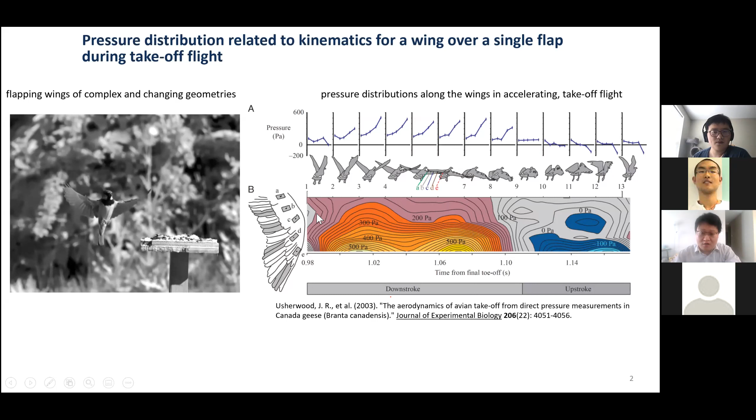Here is a wing of a bird model. You can see here are 5 pressure sensors on the wing. During acceleration and takeoff flight, you can see a very large variation on the pressure distribution. For the downstroke, the pressure distribution is basically positive, but for the upstroke, the pressure distribution becomes negative. During the acceleration, we can find very large pressure variation along the wing.

Basically, many studies have confirmed that birds can actually sense small changes in air pressure. In that case, they can have some prediction for the storm in front of them, so they can prepare themselves for the storm. We're inspired by this idea that maybe for the aircraft, it can also sense the surface pressure on the aircraft, and then it will benefit the flight control for the gust response or something else like the environmental flow.

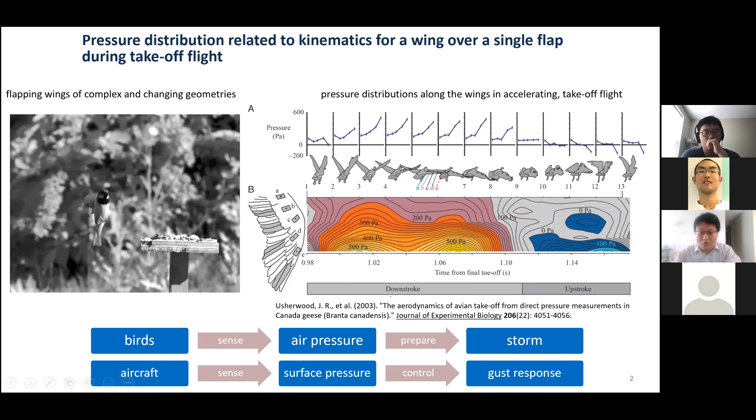Basically, our idea is something like this. We want to get the mapping between the surface measurement and the measured aerodynamic loads. In this way, we can predict or estimate the aerodynamic load from the surface pressure measurement. This model can also provide some insight on how to optimize the sensors located on the aircraft and how many sensors we need to do this job.

Basically, our research focuses on this routine. We care about the gust and any other environmental flow on the aircraft, and we get some major information from the surface pressure measurement. We use that information to estimate the aerodynamic loads on the aircraft. So this is the basic idea of our research.

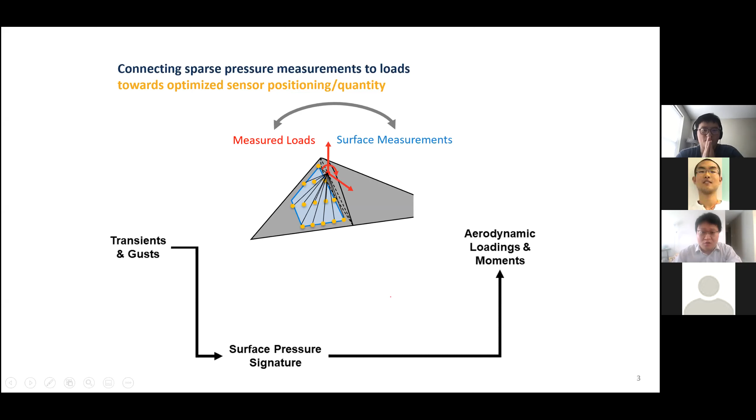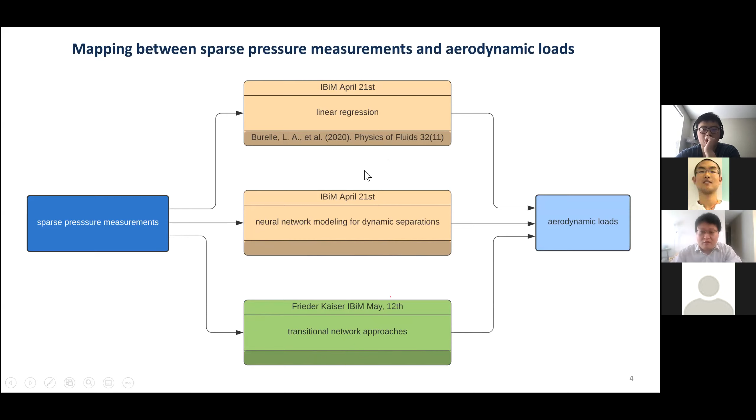For our group, we are developing 3 different approaches for the mapping between the sparse pressure measurement and the aerodynamic loads. Today, I will focus on the first 2 approaches. One is linear regression, and this part of the job has been published in Physics of Fluids already. Another part of the job is we want to get a neural network model for the dynamic separations on the aircraft. Finally, another approach is the transition network modeling, which will be introduced by Frieder on May 12th. So basically today's talk, I will focus on the first 2 approaches.

Here are some open questions my talk may attempt to answer. The first question is, can we actually predict aerodynamic loads from sparse pressure measurements? The second question is, how many sensors do we need to accurately estimate the aerodynamic forces? And the final question is, what is the optimal placement of the pressure sensors?

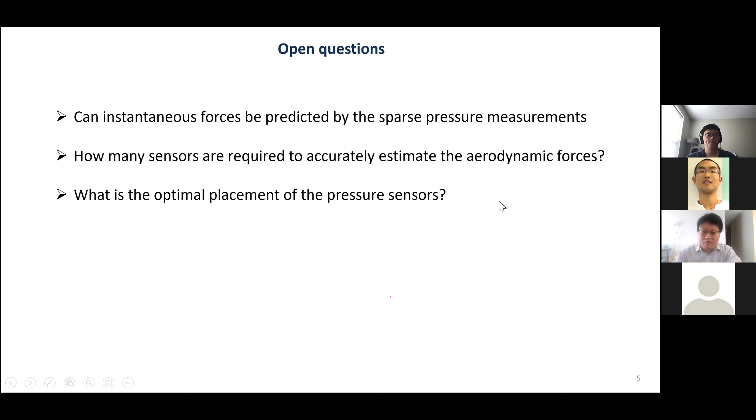Already some research has focused on how to get reconstructed flow information from sparse measurements. For example, Erichson placed sparse sensors on the surface of a circular cylinder, and used this sparse measurement to reconstruct the flow structure for flow past the circular cylinder. Other researchers like Peng also used sparse measurement to predict the flow structure, but for this case, they focused on the 2D airfoil.

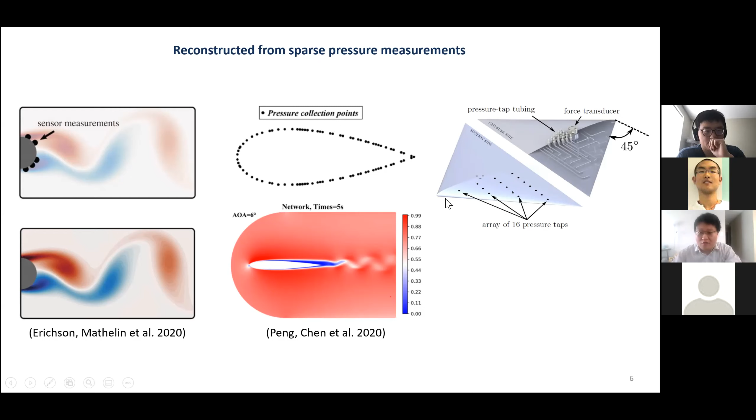Today, for our research, we focus on the delta wing, especially the non-slender delta wing. For this delta wing, we have 16 pressure taps. The delta wing was 3D printed, and all the pressure channels are located inside it. In this way, we get information about the surface pressure on the delta wing, and we reconstruct aerodynamic loads from those pressure taps.

Today I'll first introduce our experimental setup, and then introduce our linear regression between the sparse pressure data and the aerodynamic loads. Then I will introduce some preliminary work on neural network modeling for dynamic separation. Finally, I will introduce some future plans for this research.

For our experiment, it was conducted in a towing tank at Queen's University. As shown here, the model moves from right to left, and we have a linear actuator to drive the vertical motion, and a traverse that can move in the streamwise direction. Here we use the normalized distance to evaluate the motion of the delta wing.

We actually focus on two types of gusts here. One is the axial acceleration—in this case, the delta wing starts acceleration from some point, and after some distance, the acceleration becomes zero, and it continues to move to the end. The other type of gust is a vertical gust.

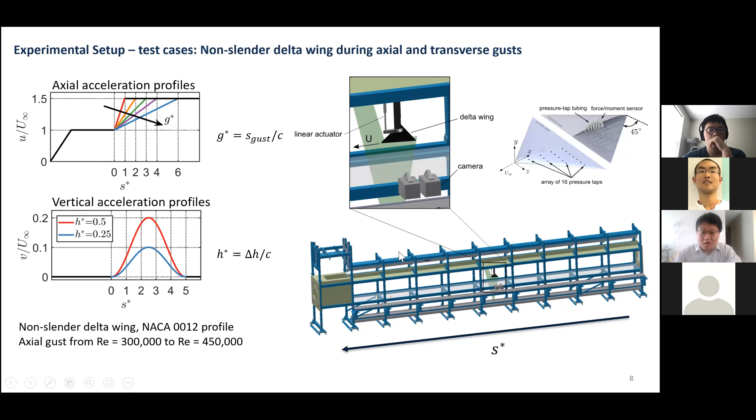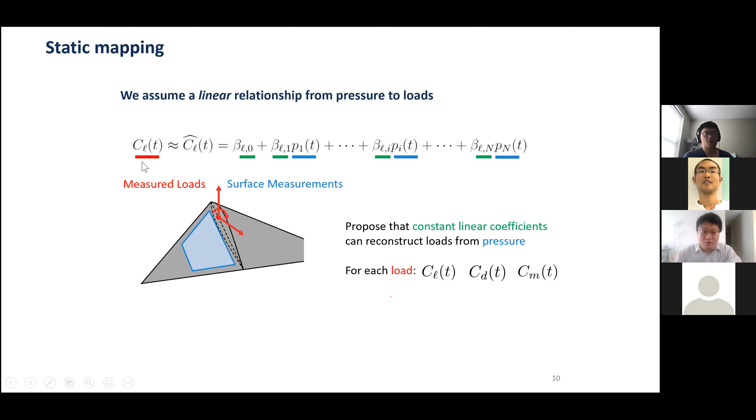We got 15 or 14 pressure taps on the delta wing, so we got the pressure data in the time sequence. For this work, we want to get the coefficients to build the linear regression between the aerodynamic load and the pressure data. For this, we minimize the cost function here.

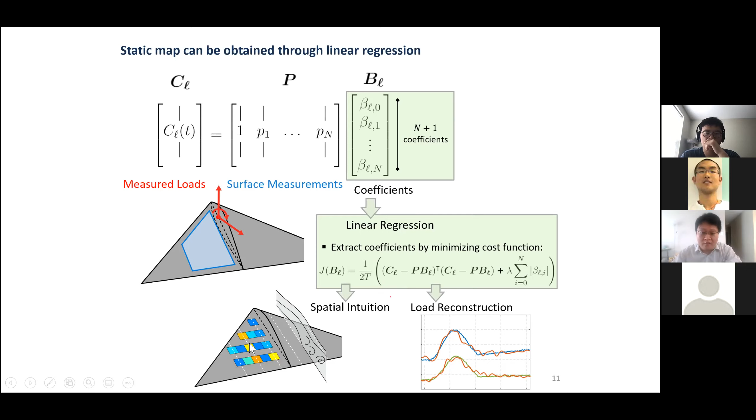In this way, we can determine all the coefficients here and get the load reconstruction. With this, we can also find some critical spacing, or critical location, of the pressure sensors on the delta wing. This gave us valuable insights on how to reduce the number of sensors and how to optimize their location.

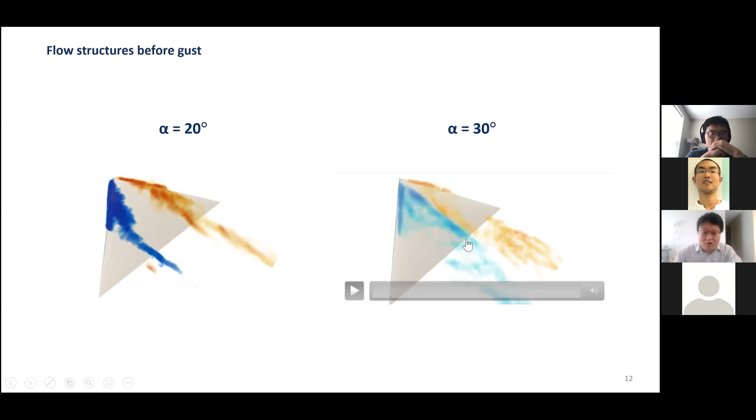For this job, we focus on the delta wing. Here are two examples of how the flow behaves over the delta wing. The left example is for the 20 degree angle of attack, the right column is the 30 degree angle of attack. As you can see, for the 20 degree angle of attack, there is a very strong leading edge vortex over the delta wing. But for the 30 degree angle of attack, due to vortex burst at the leading edge, there is no strong flow structure over the delta wing.

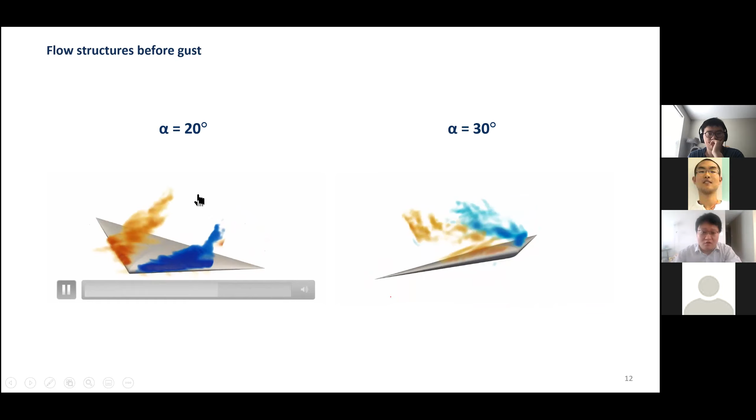For our experiment, the delta wing moves with this inertial condition, either in vertical gust or axial gust. First, let me introduce the results about the axial gust.

In this case, the delta wing first has a constant speed of about 1 meter per second, and then it accelerates to 1.5 meters per second. Right now I'll show the results for G star equals 1 and G star equals 2.

For the 20 degree angle of attack, we can see that the linear regression works well, getting results pretty close to the aerodynamic load measured by the force sensor. We can see at the beginning of the gust there is a very sharp increase of the lift coefficient.

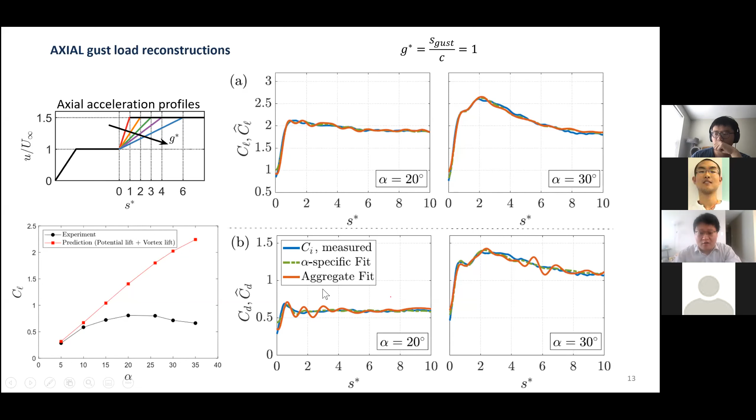One possible explanation is that in our experiment we only used the pressure sensor, we don't have the shear stress sensor. So it may not be accurate to estimate the drag coefficient. In the future, maybe we can add some shear stress sensors to improve the accuracy.

For the vertical gust, we use a linear actuator to drive a vertical acceleration profile like this.

For the vertical gust, the maximum effective angle of attack will approach 11 degrees when h star equals 0.5. If h star equals 0.25, the effective angle of attack will approach 5 degrees. So if the initial angle of attack is 10 degrees, the maximum effective angle of attack will become 20, which approaches the edge of the stall.

If the initial angle of attack is 30 degrees, the maximum effective angle of attack during the gust will become 40 degrees. That is a very large value, but even in this case we can find a very large lift. That means the vertical gust can also induce the leading edge vortex, and that vortex can provide some lift over the delta wing.

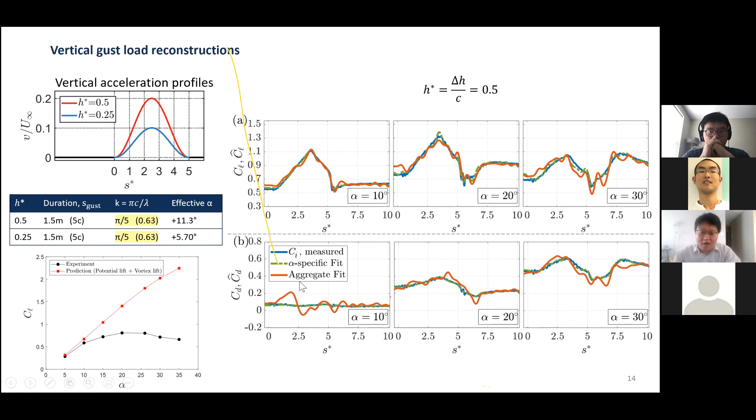Another part of this job is to try to optimize the pressure sensor location on the delta wing. This part of the job is related to regularization.

During our regression, we minimize a cost function that includes two parts. The first part describes the difference between the measured value and the regression estimation, which is why we minimize it, so our prediction stays close to the measured value.

The other part of the cost function is the lasso regularization. We introduce this because we want to reduce the magnitude of the coefficients in the regression. For example, without this lasso regularization part, the prediction will have very large fluctuations in the estimation. We call this situation overfitting.

If we increase lambda, we enforce a reduction in the magnitude of the coefficients. Then the prediction becomes smoother, without very large fluctuations, so we assume this is a good fit.

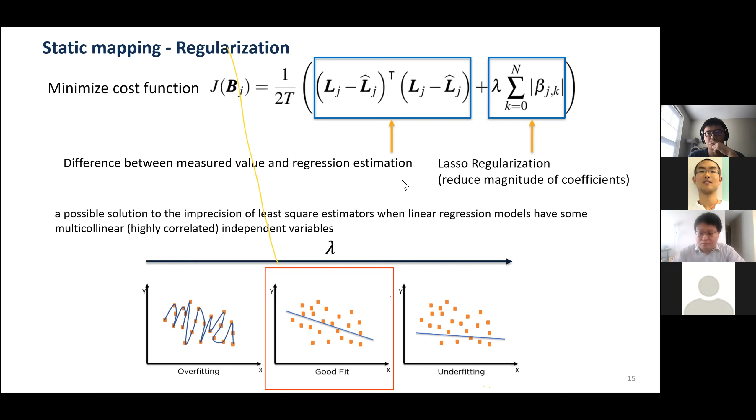If we increase lambda, the error of the regression becomes larger, but at the same time the number of non-zero coefficients decreases with increasing lambda. This situation is basically the same for both the axial gusts and the vertical gusts.

In this case, we prefer to choose lambda at 2. There, the error didn't increase too much compared to the small lambda case, but we actually have a smaller number of non-zero coefficients—only 9 non-zero coefficients for the linear regression.

That means we actually reduce 5 pressure sensors for the delta wing, since those pressure sensors don't provide any information to the linear regression. In that case, we reduce the number of sensors.

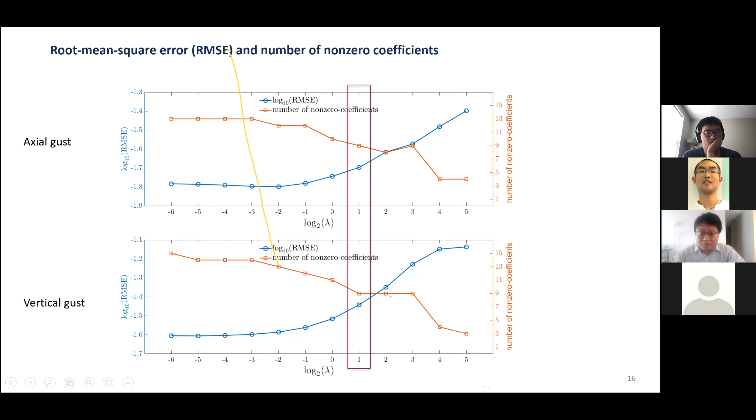We also need to check whether the reduction of pressure sensors can provide better linear independence for the linear regression. So we use the variance inflation factor, VIF, to estimate whether the estimator is linearly independent from the others. Basically, if the VIF is below 10, we assume the estimator is linearly independent from other estimators.

For example, as we increase lambda from left to right, the non-zero coefficients on the delta wing become fewer and fewer. First we have basically 15 non-zero coefficients on the delta wing, but finally we only have 4. The VIF values for lambda equals 2 are basically below 10, meaning the remaining 10 pressure sensors are basically linearly independent.

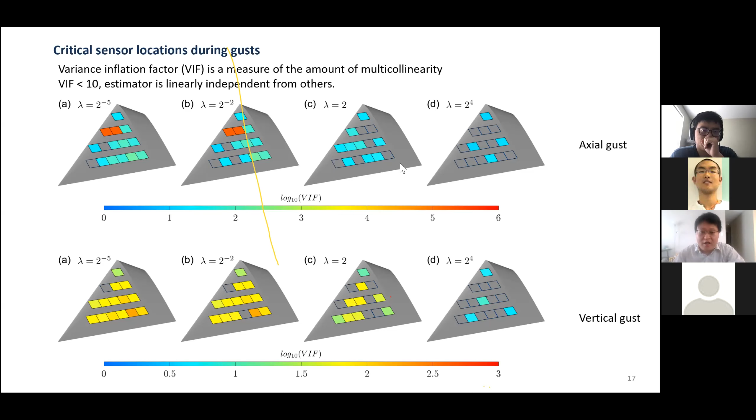Okay, next I will introduce our work on neural network modeling for the dynamic separation.

Our project focused on the non-slender delta wing. For the slender delta wing, people already developed theoretical analysis about the aerodynamic loads, shown here. The theoretical analysis includes two parts: the first is from potential theory, the KP term, and the other is from vortex lift, shown as the KV term. Both KP and KV are functions of the aspect ratio of the delta wing.

These equations work well for the slender delta wing, but they don't work for the non-slender delta wing, especially at high angle of attack, as shown here. The dark line is our experiment on the non-slender delta wing, and the red line is the prediction from theory. At small angle of attack, our experimental results agree with the theory, but as we increase the angle of attack, the difference becomes larger and larger.

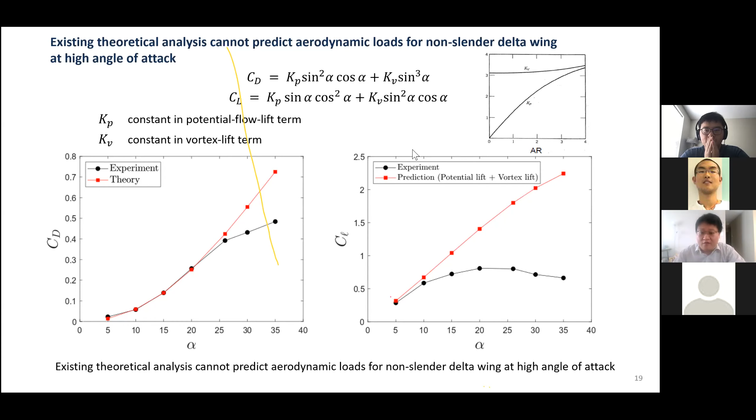This shows the difficulty in predicting aerodynamic loads for the non-slender delta wing at high angle of attack. This is something that has to be addressed, so we want to use a neural network to correct these equations and get good predictions for lift and drag.

The reason current theory doesn't work for the non-slender delta wing is the complex flow structure of the wing. As shown here, at 20 degrees we get a leading edge vortex, but after some point the vortex bursts and we don't have very strong vortices anymore, meaning the vortex lift theory doesn't work past that point.

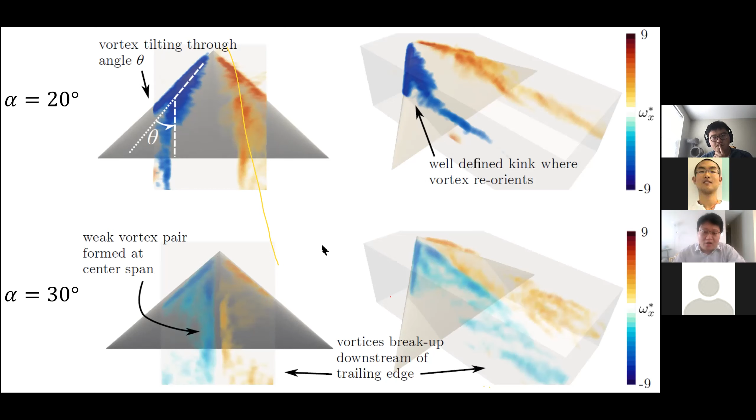For the 30-degree angle of attack, the situation is even worse - vortex burst happens at the leading edge, so we cannot observe an obvious flow structure over the delta wing. That's why current theory cannot provide good estimation of aerodynamic loads over the non-slender delta wing, so we want to make a correction to the current theory.

We introduce a term to estimate the flow separation over the delta wing, using F as the attachment degree. For fully attached flow, F equals 1, and the lift coefficient equals the current theory's prediction. When the separation point reaches the leading edge, F equals 0, and the lift coefficient is just 1/4 of that predicted by theory. We add this parameter to our model.

The following image shows the flow separation during the gust. Here is a vertical gust case with 20 and 30-degree angle of attack. For the 20-degree case, the flow separation first decreases and then increases back to 0.4. But for the high angle of attack case, the attachment degree stays constant between 0 and 0.1, meaning the delta wing basically experiences full stall during the gust.

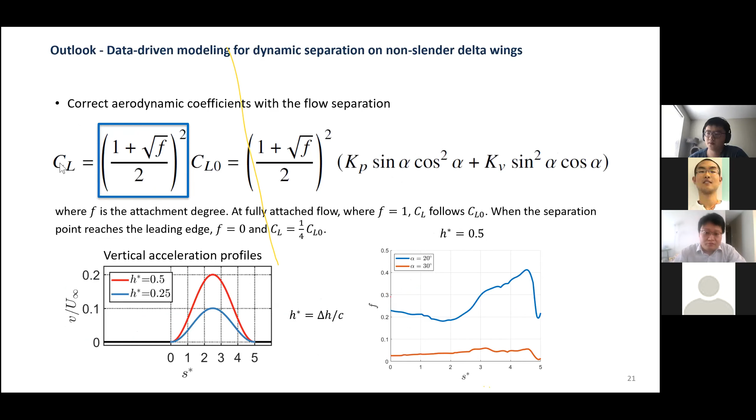This is the final results we got from the network modeling. As we can see, the measured lift coefficient agrees with the prediction from the neural network. This result is pretty good.

For comparison, we can see from the linear regression, for the 30-degree angle of attack, there is an obvious difference between the measurement value and the estimation from the linear regression. So we can see that the neural network did a much better job than the linear regression.

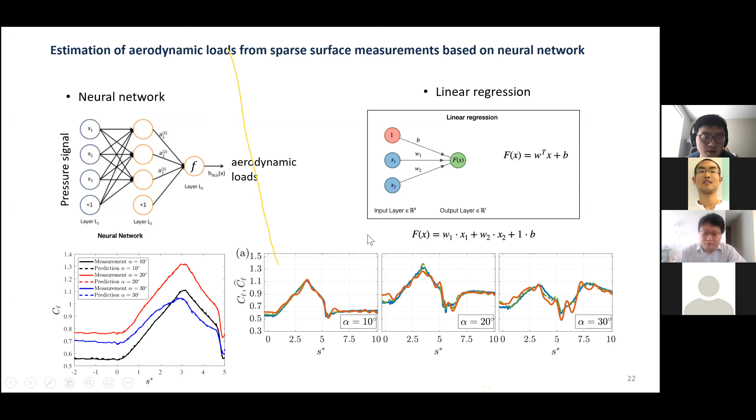But there are also drawbacks for the neural network. For its advantage, it can simulate any continuous function in this world, at least if the neural network includes one hidden layer and uses nonlinear activations. If the neural network meets this condition, it can simulate any function in the world. That's a very obvious advantage.

But it also has very obvious drawbacks. First, we need a lot of data here. Basically, it's not who has the best algorithm that wins, it's who has the most data that wins. So for the neural network, we need a lot of data.

But for our experiment, it's very expensive to collect data. So that's a huge drawback for the neural network used with experiment data.

Another drawback of the neural network is that it lacks physical understanding. It doesn't understand Newton's second law, and it doesn't understand why the density cannot be negative. So basically, we cannot get very good physical insights from the neural network.

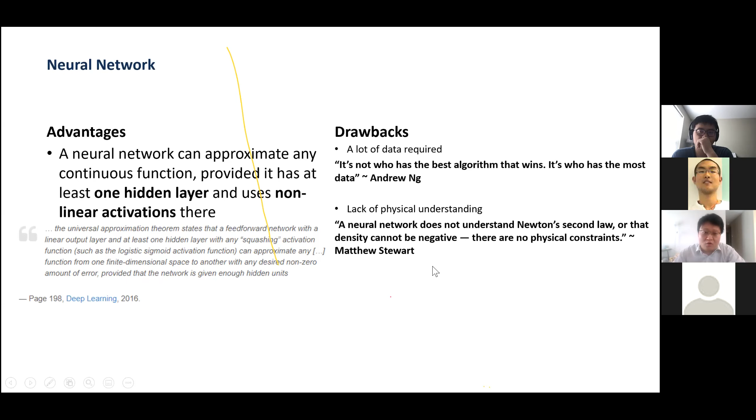So from those two points, we design some future work that will solve the above two drawbacks and get a better model for our experimental data.

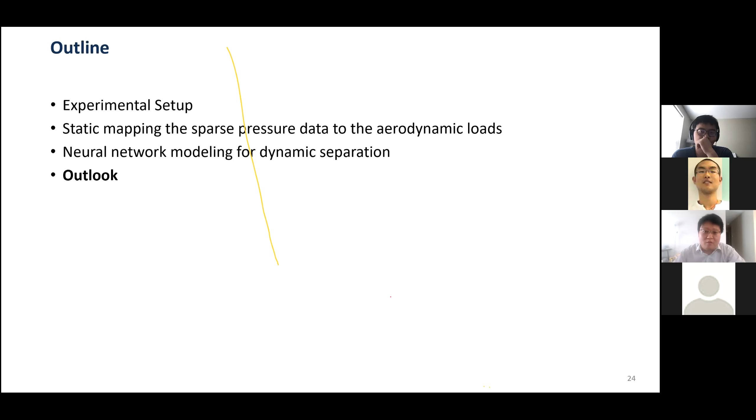For the first part of the future work, we want to try to estimate the aerodynamics for multiple types of gusts. For our current case, we only care about the transverse gusts, or the vertical gusts, as shown here. But actually there are so many types of gusts in the world, and people already did some studies there.

For most applications, people care about random gusts like this, with random velocity fluctuation during the gust. So for the next stage of our work, we try to test our model for all kinds of different gusts and try to see whether this data can provide better modeling for the gust control.

Another major direction for our next step is we want to get some network model that relates the pressure network to the vortex topologies. For example, here this is a delta wing, we have a very strong leading vortex with a very strong 3D flow structure. We want to get a mapping between the sparse pressure signal and the vortex topologies. That's the next step of our research.

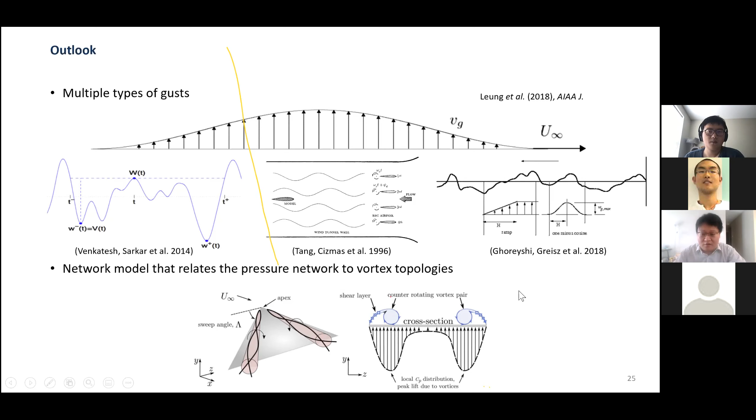For the transverse gusts, we modeled using pure plunge. Actually, we have to acknowledge that pure plunge is not the perfect transverse gust. Our group had done some modeling before, and found that if we want to model the transverse gust, we actually need a very complex motion, which includes pitching motion, plunge motion, and surging motion. So it's very complex.

But for our vertical gust case here, the reduced frequency is basically about 0.63. From this modeling, we know that if the reduced frequency is below 0.5, the accuracy will increase to 90%, meaning the motion is pretty close to the transverse gust. But for our case, K is below 0.75, meaning the accuracy of the pure plunge to the transverse gust is only 85%.

So this is a good simulation, but it's not perfect. Our next job is to improve the accuracy from 85% to 100% by using a very complex motion, which is just a combination of pitching, plunge, and surging. In this way, we can simulate the actual gust in the real world.

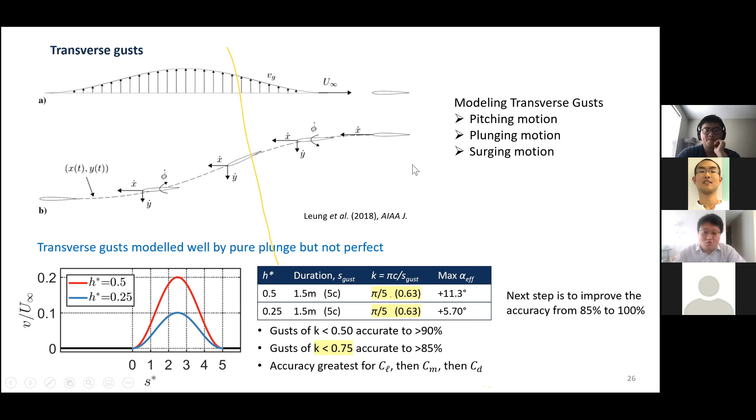Another work is how to get the connection between the surface pressure and the vortex structure over the delta wing. These results compare the connection between the pressure gradient on the delta wing and the vortex structures over the delta wing. As you can see, for the 20-degree angle of attack, we have a very strong leading vortex here.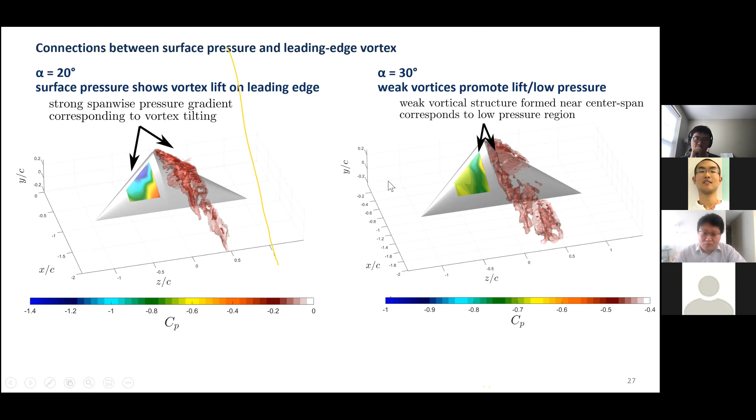We can see there is also a strong span-wise pressure gradient here, which means there is a strong connection between the pressure information and the flow structure. For the 30-degree case, we find the same thing, but the flow structure is not obvious because of the vortex burst. For the pressure signal, we find that the pressure gradient is small.

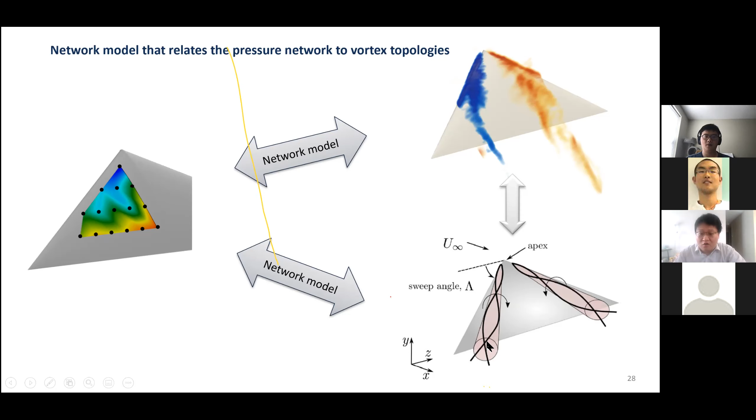Basically, the information from the pressure distribution is not as obvious as in the low angle of attack case. This gives us some idea that the flow structure is highly related to the pressure distribution. So for the next step, we want to build a network model between the sparse sensors on the delta wing and the flow structure over the delta wing. This job may be too difficult for us to conduct, so we want to use some reduced order model instead. For this case, we don't reconstruct the full 3D flow over the delta wing, but just reconstruct some major information of the flow, such as the position of the vortex line and the strength of the vortex over the delta wing.

So for here, this is detail. If we have the delta wing, we can find that this is the vortex line. At the beginning, the vortex line is along the leading edge, but at some point we get vortex tilting, and the vortex line changes direction. Basically, we care about 7 parameters. The first 3 are the position of the vortex tilting, that is, the spatial location of where the vortex tilting happens.

Another important parameter is the circulation feeding rate, how the circulation increases from the apex to the vortex tilting point. After this point, the direction of the vortex line is also important for us to reconstruct the aerodynamic loads. So finally, we care about these 7 parameters, and we want to build a neural network between the pressure signal and those 7 parameters to build the model.

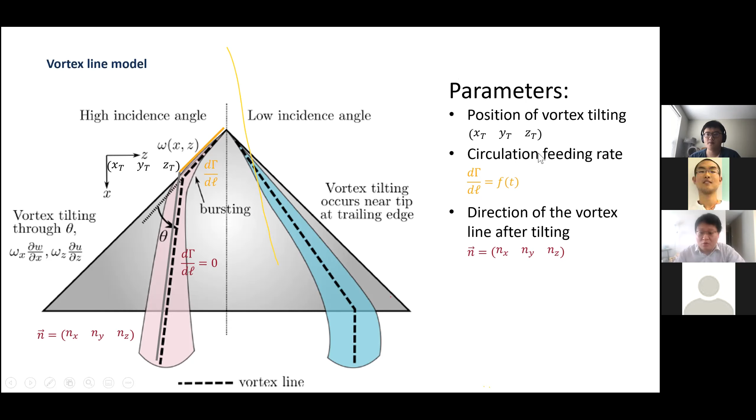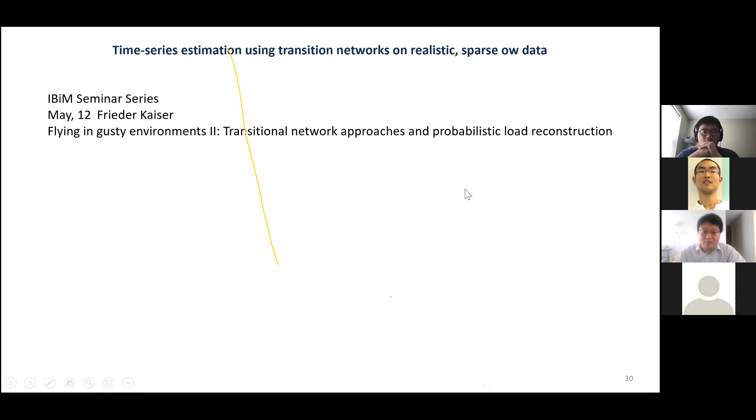Another part of the job is about the transition network approach, which will be introduced by Frieder on May 12th. Hope you guys can also be interested in this direction. They use the transition model to get some reduced order model of the flow, and look at the information from the phase space.

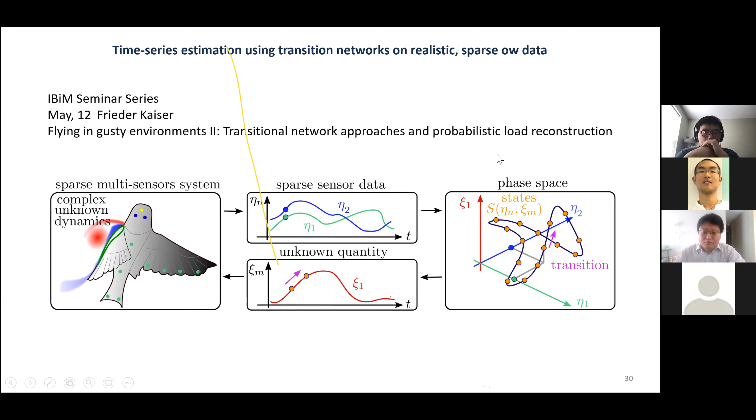So now let me make some conclusions. First, from our research, we found that static mapping can actually get good fitting between the pressure information and the aerodynamic load. The lasso regularization we use in this study provides valuable insight into sensor reduction. From the lasso regression, we can also get information on how to optimize the pressure sensors over the delta wing. For future work, first we want to use neural networks and other advanced models to predict the unsteady aerodynamic loads from the pressure signal.

Another thing is that we want to build a mapping between the flow structure and the pressure data over the delta wing. So I'll stop here, and welcome any comments and suggestions on our research.

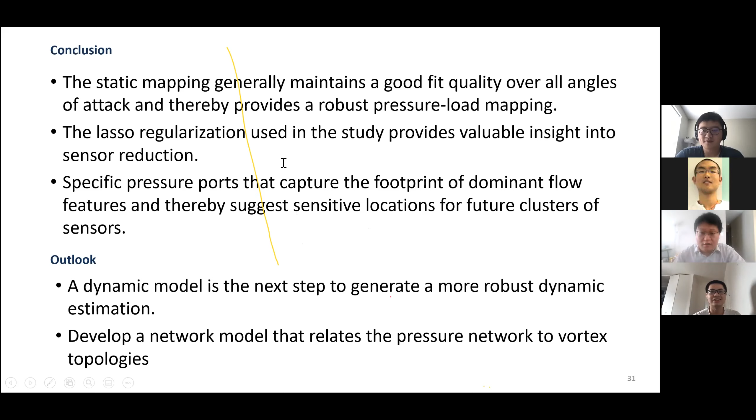Hi Wenchao, I have a question. This is Shai, can you hear me? It's good to see you again. Yeah, it's a very good talk and very interesting, and I have a question.

You mentioned that you used a neural network to approximate the aerodynamic load, and there are no physical constraints, and it requires lots of data, right? So my question is: is it possible to use a physics-informed neural network? That means you use the neural network to approximate the aerodynamic load, and at the same time compute the loss function using the differential operator, and minimize the loss function so that you have physical constraints. Will this get better results? And of course, this will require less data.

Do you think this helps to get better results? Yeah, I guess so, but maybe there are also some challenges, because for experiment data we have large noise, so we don't know whether the noise level can influence the prediction performance of the neural network. Basically, all the results published are just simulation work, so there's no noise in that work, and sometimes they add some noise manually into the model, just to check the effect of the noise on the model.

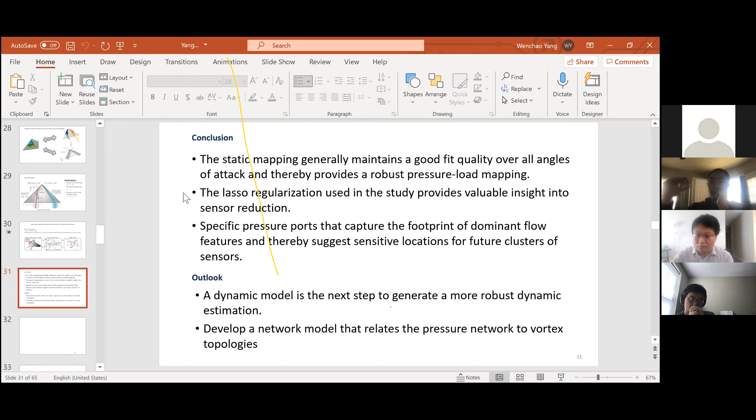Yeah, so if it's mainly accelerating, then the high pressure section maybe isn't facing any detached vortex and things like that. But if you're decelerating, then maybe the trailing edge and leading edge vortex will be rolled up into the belly section. That may force some very interesting phenomena later into modeling.

So right now we only have the acceleration gust case, and we didn't see any obvious reverse flow or anything, so maybe it's not an issue here. But we have some plans for the deceleration gust, so maybe that's an issue in the future and we need to care about that.

Actually, I have a very technical question. I've also been using pressure sensors, and they're notoriously known for a high noise ratio - the signal to noise ratio is pretty low. Did you see that in your experiment, and if so, how did you mitigate that?

That's indeed a challenge, and we also found there is a large noise in the signal, but we just filtered out the high frequency part during the experiment. That's a very good question, and that's something we need to care about.

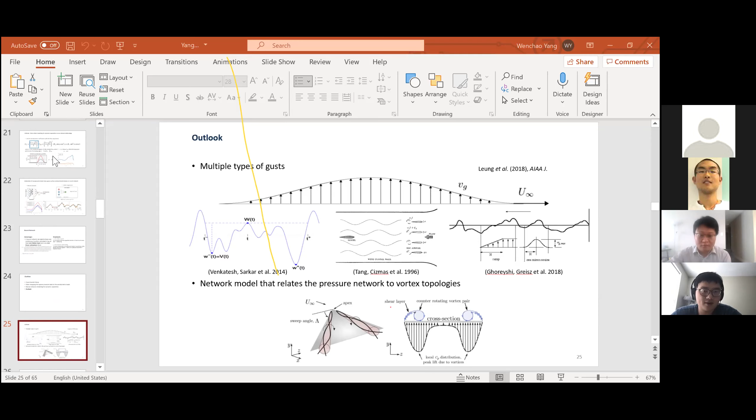Wenchao, could you go to page 21? I have a question about the model. Does this kind of CL have any memory effect depending on alpha? Meaning it's not just depending on the instantaneous value of angle of attack, but also on the history of the angle of attack.

Sorry, I cannot understand your question. Go ahead, you mean the attachment degree actually has history information, right? Yeah, that's my question. That's true. And is that important or not?

Actually, that also gives us some insights on how flow separation evolves in the time sequence. Maybe during the vertical gust, the flow separation has its traces, so it offers us information on how the flow evolves during the gust. That means the angle of attack alone is not enough - we need history information to predict the aerodynamic load. That is true, I see.

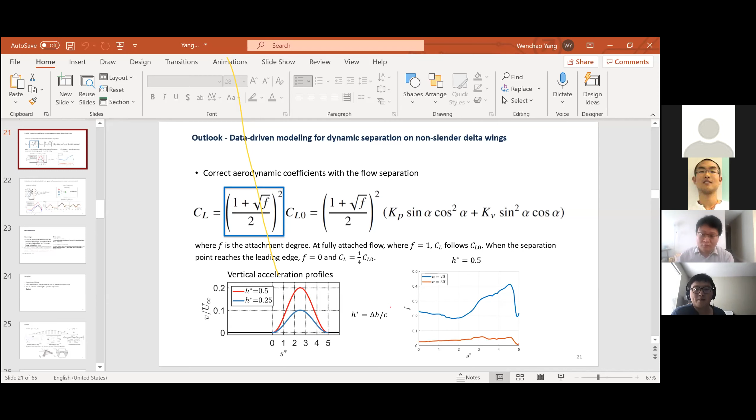Okay, last question - this is very cool. Basically you use data from several locations to estimate the integration, the total load. Is it possible that we can make a prediction of the whole flow field? I mean the whole pressure field on the wing surface, because that's something we're aiming for.

We hope so, we hope it can do the job, but maybe it's not - that's just an ambitious plan. We want to create a loop there, so we can use a neural network to estimate aerodynamic load from the pressure signal. But we can also do it another way: we can use fluid dynamic theory to predict the pressure distribution from the flow structures.

In this way we can generate a loop - from the pressure data to the flow structure, and from the flow structure back to the pressure data with the knowledge of fluid dynamics. If we have this kind of loop, we can convert all the data into a situation where we can use pressure data to predict the 3D flow over the wing, giving us a good estimation of the pressure distribution on the wing overall. That's something we hope to get, but it's an ambitious plan - maybe it won't work. That's some preliminary plan for our future work.